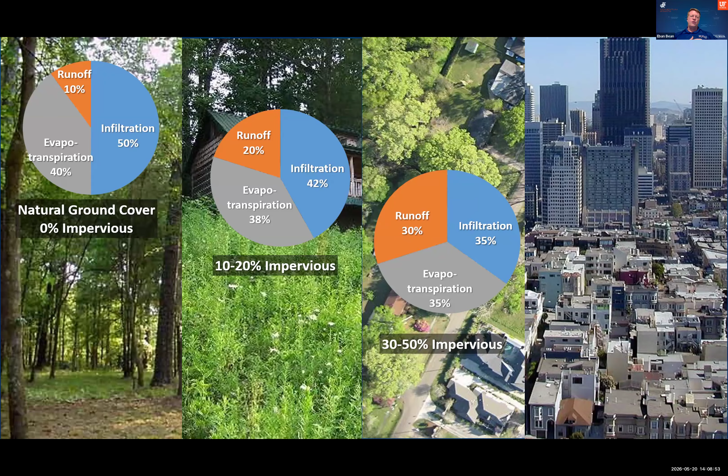And now when we look at 30 to 50% impervious, think of your residential development, basically quarter acre lots or smaller, we've got maybe 35% infiltration, 35% evapotranspiration, and we're up to about 30% runoff. And then in our ultra urbanized downtown urban centers, only about 15% of that rainwater infiltrates through cracks and limited pervious area. Then 30% is evapotranspiration, which is most likely evaporation from puddles. And about 55% of that rainfall actually runs off.

Now, if we take the 30 to 50% imperviousness, the residential neighborhood, and compare that to natural ground cover, 10% runoff to 30% runoff, that doesn't sound like much. There's only a difference of 20%, but it's actually 3 times as much rainfall being converted to runoff by changing the landscape that way.

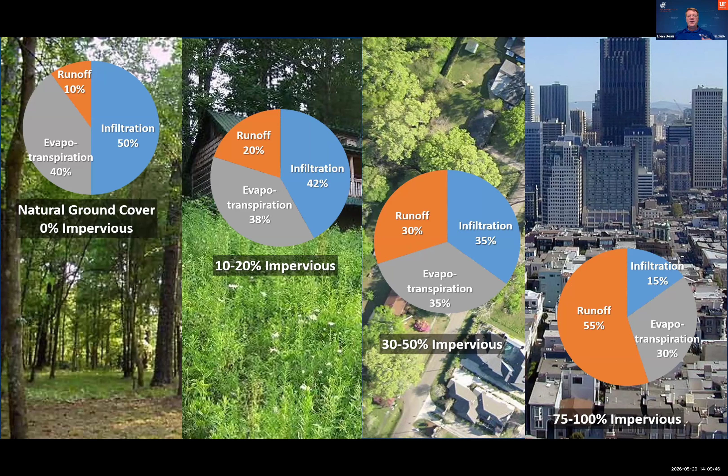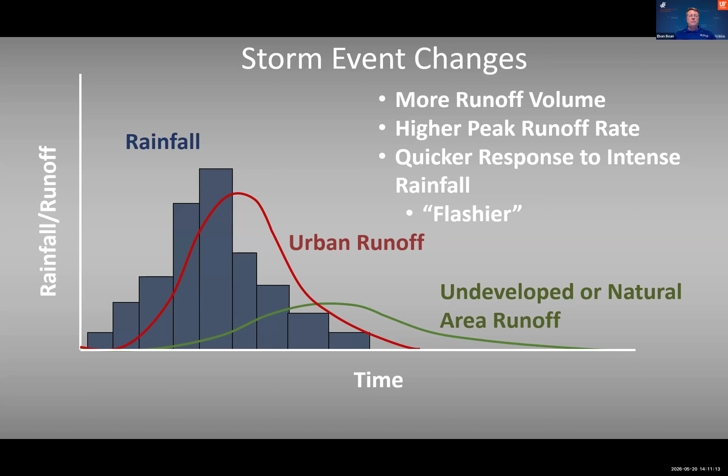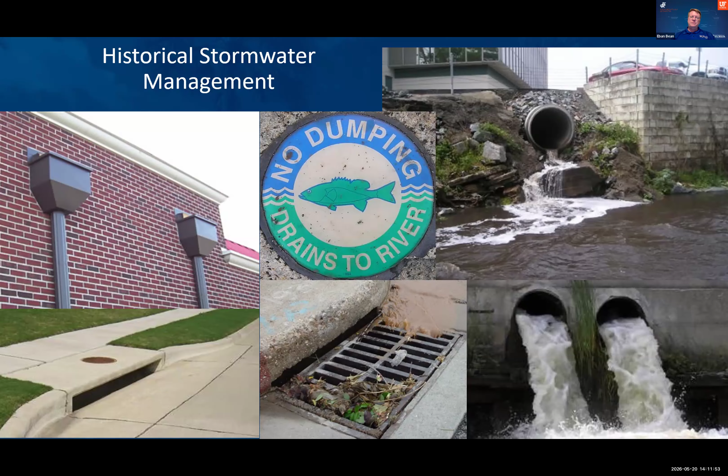And historically, our approach to stormwater management has been to essentially get water off site as quickly as possible. If you look at a lot of older cities and the older downtown parts, you'll probably see some examples of this. You probably don't see many ponds or open spaces. It's just pipes directed to the nearest creek or waterway. And we've gotten pretty efficient at this. You'll see scuppers on the side of buildings that route roof runoff directly down to the street. We've got stormwater inlets and grates, and then those go into stormwater pipes that discharge into that nearby waterway.

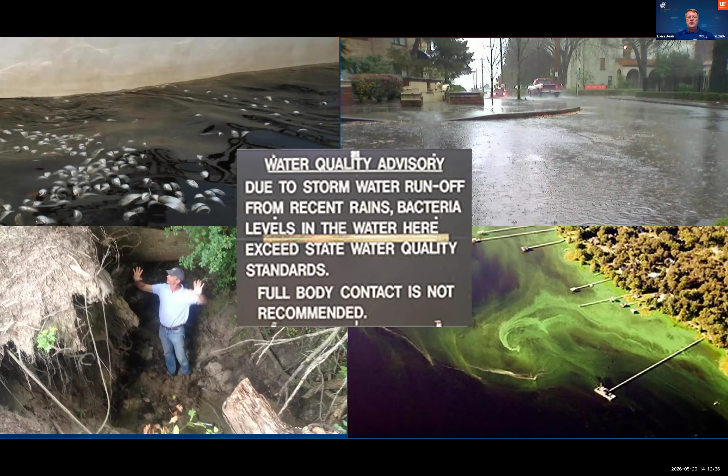But within that stormwater runoff, there are also water quality issues that come from it. We can have fish kills. We can have erosion. This is a friend of mine that's about 6'4" in a channel that's about 20 feet deep by about 6 feet wide. But we also have excess flooding. So when we get water off site as quickly as possible, that might be good for you. But if all that water is coming to you downstream, then you are the one that gets flooded out. That's not a good situation. And we also can have drivers for algal blooms here.

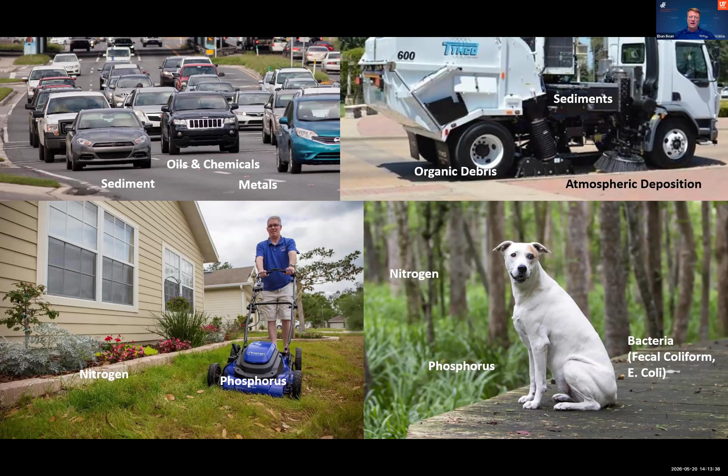When we think of stormwater runoff, it's not just the volume, though. It's the chemicals that it washes off the urban landscape. A lot of the urban landscapes can be sources for these pollutants that we're trying to manage or eliminate. Our roadways can accumulate oils and chemicals from cars, sediments, and metals like brake dust. Parking lots can collect sediments and organic debris. There's actually atmospheric deposition of contaminants or nutrients that accumulate over time. Our lawns can be sources of nitrogen and phosphorus, particularly if we're fertilizing inappropriately. And then our pets. This is not my pet, but essentially they are walking, barking point sources of nutrients and bacteria. If we don't pick up after them, that can enter the environment and wash off as well.

So let's start it off. Let's give a trial to the quiz poll here. Becky, if you'll go ahead and start that first poll. All right, I'll give you a little bit of time, but the sooner we get everybody's responses in, the sooner we can continue on. Let's go ahead and get those answers in. All right, I'll close this poll in about 5 seconds, so make sure you get in there. 4, 3, 2, 1. Let's go ahead and close that out.

All right, and so the answers were: runoff is what increases most in urban areas compared to natural areas during a storm, and the higher peak flow and quicker response is what often happens with runoff. So nice job, folks. Nice job. Okay, all right. Moving on to our next topic.

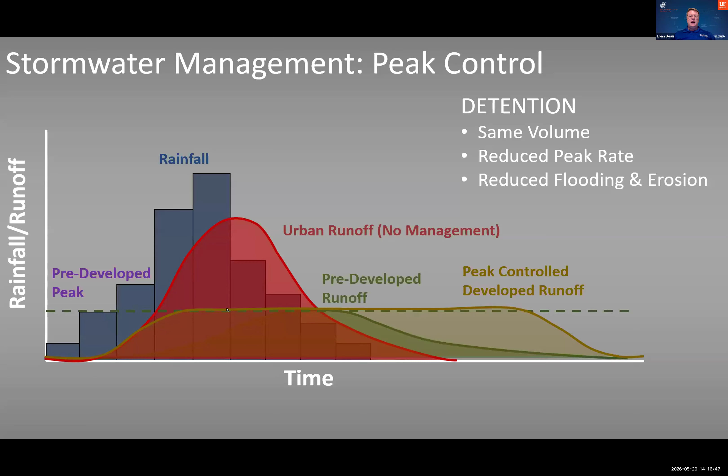So with detention, that's the approach here, where we capture that additional runoff and slowly release it over time. If we look at what our pre-developed runoff is and our urban runoff without any management, we see that increase. But if we identify this pre-developed peak as the allowable flow rate for stormwater to move through, and we capture that water and extend it out at a lower flow rate over time, we can reduce the flooding and erosion, reduce that peak rate, and reduce the risk of flooding downstream.

So when we look at the size of storms that we are trying to manage for flooding and design for, we can't design for the 1,000-year storm event. Those happen so infrequently and they're so large that it's usually not feasible to design for them. What we are typically required to design for are storms with a duration of 24 to 72 hours, and typically storms that are somewhere between a 25-year return period and a 100-year return period.

So with the return period, that doesn't mean that one storm of that size will occur within 25 years for a 25-year storm event. It actually means that there's a 4% chance of that size storm event occurring in any year. And similar with the 100-year, it's a 1% chance of a 100-year storm happening every year. So that's how we can have 100-year events in multiple years that are not separated by 100 years.

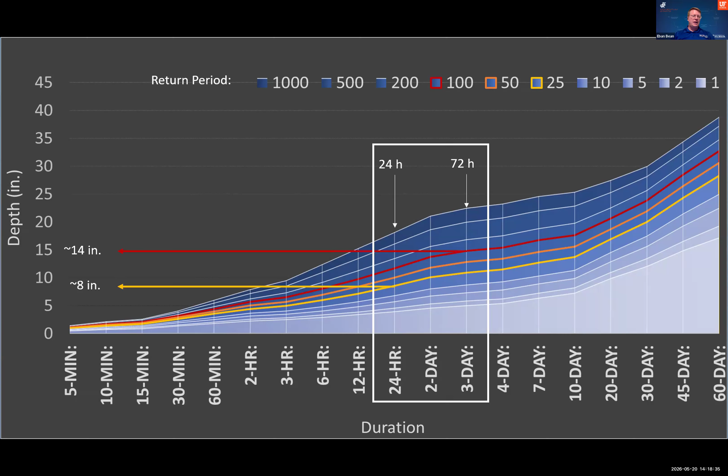Okay. But if we look at the size of these storm events for flooding, we're looking at somewhere between 8 and 14 inches of rainfall as that design storm. So if we have a hurricane or a large storm event that exceeds 15 or 20 inches in many parts of the state, then that's going to have more water than our stormwater systems can manage. And it's going to overflow, and we're going to have extra flooding occur within our communities. Yeah, so I forgot to bring that up earlier. So yeah, we're looking at that range, 8 to 14 inches.

So stormwater ponds are one of the main ways that we have implemented to try to manage the flooding and manage peak runoff rates. And if we look around Florida, we did this analysis a few years ago. There's about 76,000 ponds statewide, and that's probably a low estimate now, just because of the amount of development and the continued installation of stormwater ponds around the state. There are so many stormwater ponds that they even take up more area than industrial land uses, which is pretty surprising. So it's a pretty prevalent part of the urban landscape.

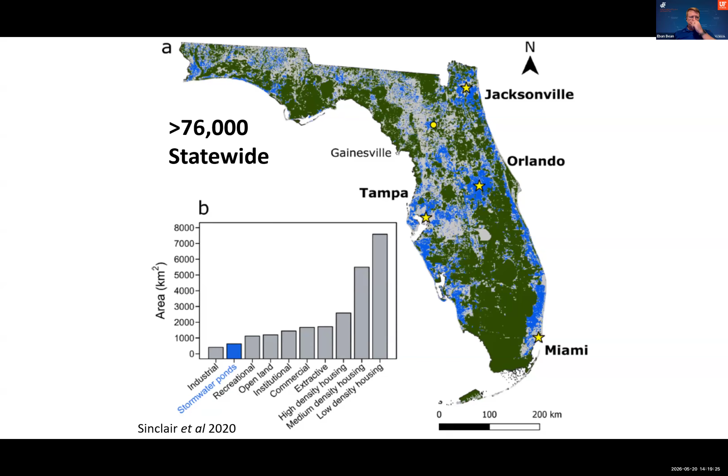So the orientation, or what we typically see within a lot of land development and a lot of projects around Florida, is that we have our urban area, and in this case, we're looking at a residential neighborhood. We've got rooftops that drain into the driveway and then flow into the street, which then flows into a storm drain inlet and into a stormwater pipe collection system that then goes into a stormwater pond for an area of this residential development.

And this stormwater pond is intended or designed to address several things. Number one is flood control. So capturing that runoff volume and then slowly releasing it. By doing that, it's also reducing that peak rate. And then we also have water quality benefits.

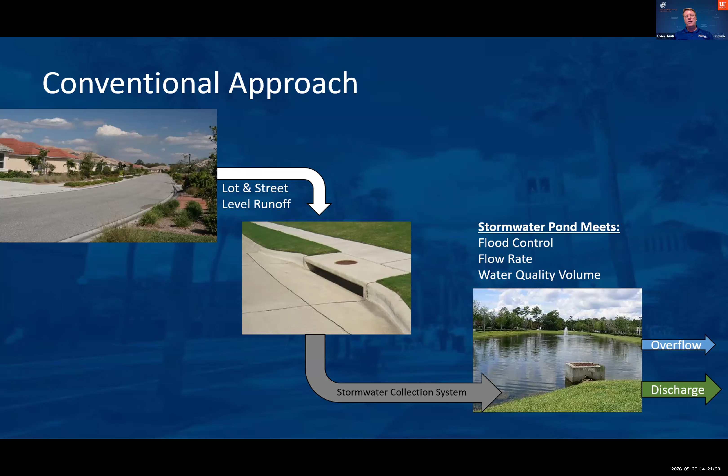Now, one of the things that is unique about Florida compared to many other states is that anywhere else in the country, the pollutant of concern that causes the most problems is total suspended solids, or sediments in the water. And oftentimes they have very fine clay soil that will make it very cloudy. And those areas oftentimes have a lot of steep topography, much steeper than what we have in Florida. And so they can actually get a lot of channel erosion. So streams will start to cut down and widen, and a lot of that sediment can be moved from the stream channel. Not the case so much in Florida, other than maybe in the Panhandle and out to the northwestern part of the state. Here, our biggest pollutant is actually nitrogen and phosphorus. And so those are our main pollutants of concern. And that's what our stormwater pond treatment is intended to address.

So while stormwater runoff is one of the main contributors to water quality impairment, agriculture also contributes some to water quality impairment, as do septic systems. So urban is not necessarily the biggest driver, but it's one of the top causes for water quality impairment. And so it's important for us to address that. But what we see essentially is that stormwater runoff, urbanization, impairment, or the poor water quality tends to follow, over time, the urbanization of watersheds.

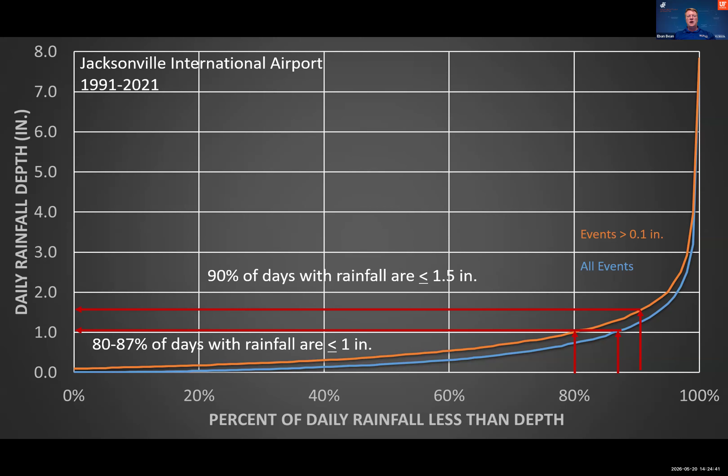And what's interesting is that a lot of the nutrients in runoff, particularly nitrogen, is contributed by these smaller afternoon thunderstorms that occur on a regular basis, right? So it's really these smaller storm events that are driving the water quality rather than those larger 8 to 14 inch hurricane storms. So 80 to 87% of days have less than an inch, and 90% of days have rainfall that is less than an inch and a half. So a very small amount of rainfall on a regular basis is contributing a lot of our nutrients to stormwater.

So next, I want to get into the nuts and bolts of stormwater systems and talk about some of the different components, so that when you're in your communities, you can identify and see the different elements of a stormwater system and better understand what's happening there. So we're going to break it down a few ways. The watershed is the land that's developed, and that's where runoff is generated, right? Then the water comes off of that landscape, and it's collected into inlets. That's where water is directed into pipes or channels to convey it to another location. And that's where it's usually routed to a stormwater best management practice. And in Florida, many times this is going to be a stormwater pond of some type. We'll talk about what those are and how they function in a minute.

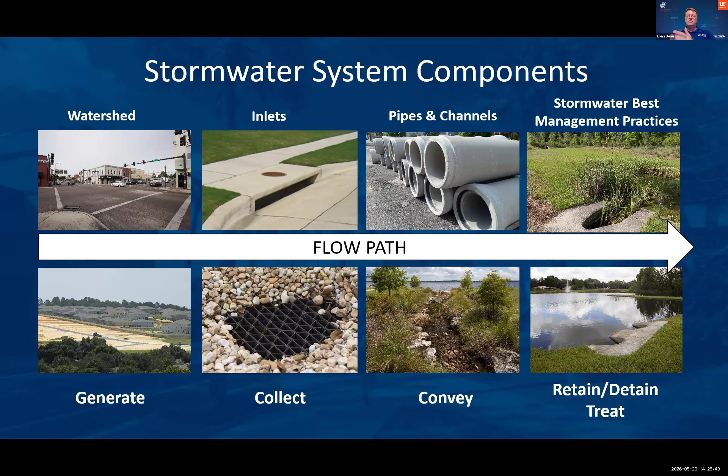But essentially, we have the flow path. We have rainfall in the watershed. That runoff then goes into the inlets, through pipes and channels, and into our stormwater BMP.

So thinking first about watershed components, within our urban area we have the impervious areas on the left, which are our rooftops, our concrete, and our asphalt. These are the surfaces that prevent water from infiltrating into the ground. And so that water, instead of infiltrating, has to go somewhere. That's our runoff. On the right, we have our pervious areas. These might be forests or landscape beds or even lawns. These are the areas that can infiltrate rainfall, that can infiltrate runoff, and provide a function to us in that capacity.

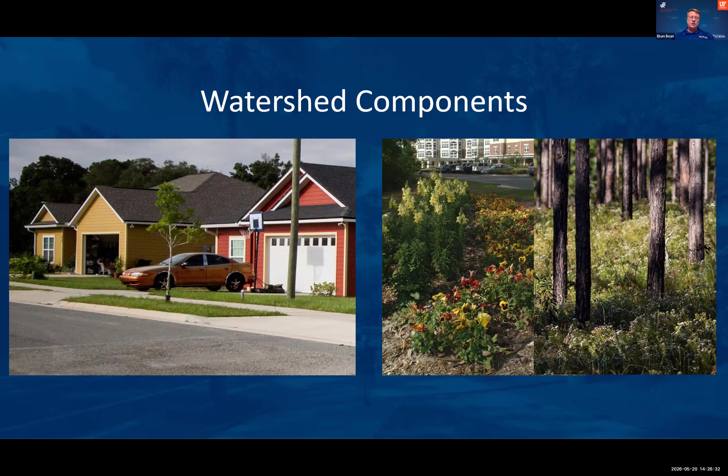Within the urban landscape, you'll often see this structure right along the sides of roads. You might have heard the term curb and gutter. I used to think that that was just the name of it, just one word, curb and gutter. But it's actually two distinct parts of the structure that's right along the roadway, right up against usually a pervious area. You have the curb, which is the vertical part, and the gutter is the bottom part. Now, you're probably familiar with gutters along the rim of your house, and that's the intent here, the place that routes and funnels water, right? And roads you'll find are typically crowned, so they're highest in the middle, so that water drains away from the center and gets conveyed to the curb and gutters.

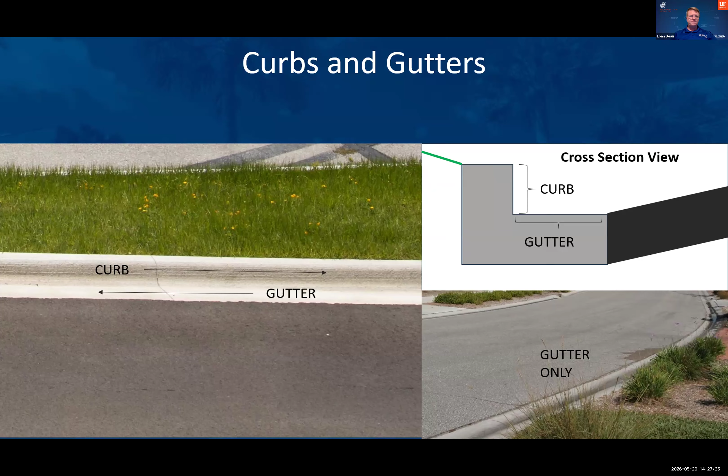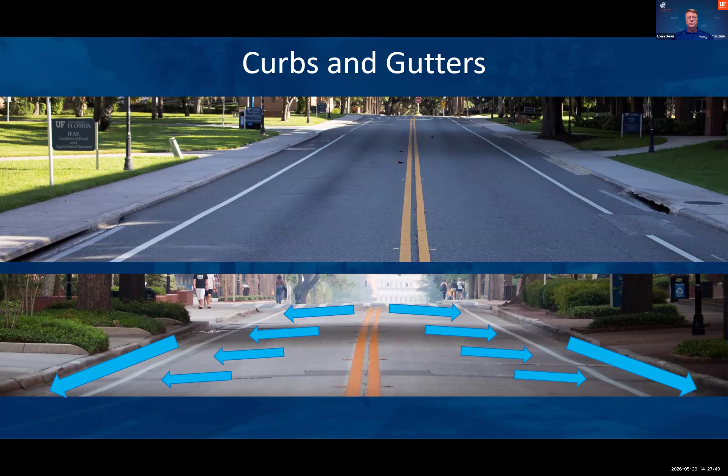Now, there's several different types of them. And this is essentially places where water transitions from the landscape into a structure that is intended to move it to a certain location. So the surface of the landscape will typically grade or slope to these inlet points. And this is usually going to be either a curb cut into a superficial inlet or a superficial structure, or you'll see a storm grate that water can basically flow down through.

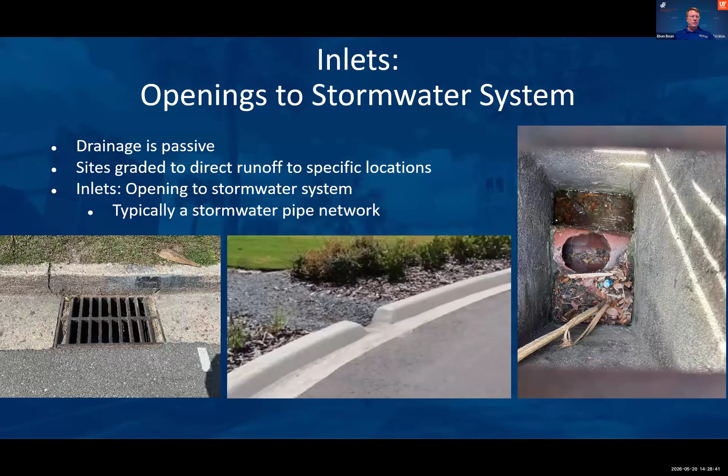So these inlets you'll see sometimes come in different flavors, if you will. These are a few examples of curb inlets where the curb goes along and there's a break in it, and then the water flows down and into a storm pipe. If you notice in the left example, there is a lot of debris that's collected there, and that will essentially eventually cause problems if that material builds up and blocks the flow of water into it.

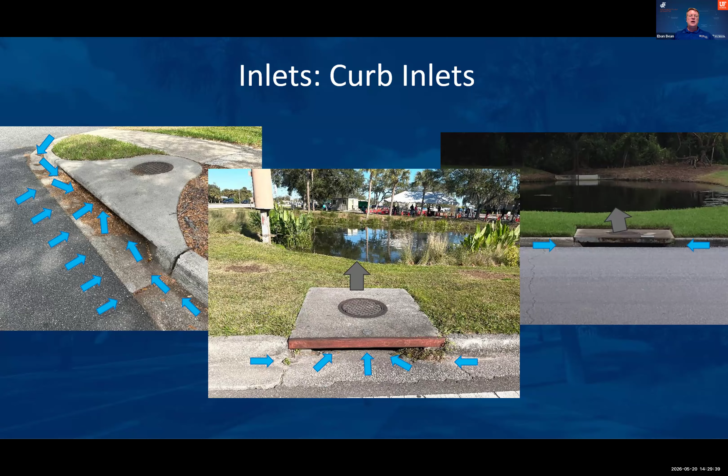So it's good to make sure we're not putting a lot of leaves down into that, and particularly not putting grass clippings, because that can carry a lot of nutrients with it. But you can see with each of these scenarios, water basically flows or is directed to the inlet and then into a stormwater pipe that then goes, in these two cases on the right and in the center, into a stormwater pond immediately adjacent to it.

Inlets and grates, these are another common feature. You'll usually see these adjacent to roadways or in parking lots. And this is in low spots where stormwater runoff can basically drop vertically into a pond or into a pipe and drain. Part of the function of a storm grate is to create a smaller opening than a curb opening so that larger debris does not make its way into the storm drain system.

Now, you do see a combination on the left of a curb inlet and a stormwater grate. That can also be a configuration that we see as well. But oftentimes you'll see these grates on their own in a low spot of the road or a parking lot. And you can see where the flow lines go with this site. Again, on the left, with that yellow curb, note the accumulation of debris there. If that continues to build up, that can cause issues with the stormwater system by not allowing water to flow through as quickly as it's supposed to.

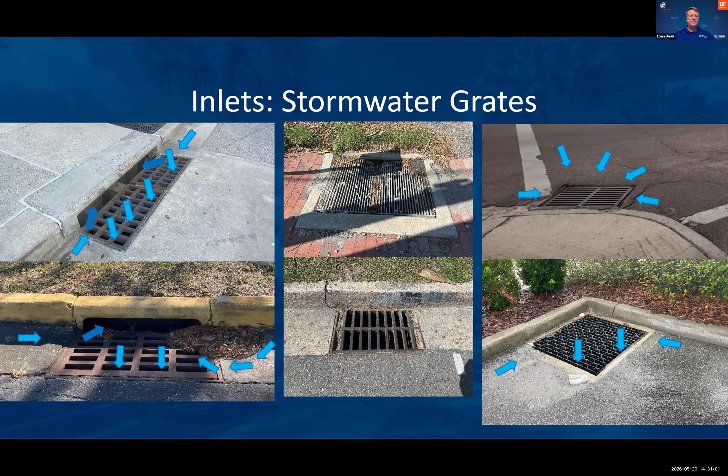Okay. Curb cuts, these are openings in the curb that basically try to connect impervious areas with the pervious area. And these are also areas where you can get accumulation of debris and cause it to back up and not function as well. But this is a really efficient way to make those adjacent pervious and landscape areas more functional so that runoff can basically flow onto this landscape and infiltrate or soak into the ground rather than having to go into a stormwater pipe network or into stormwater ponds.

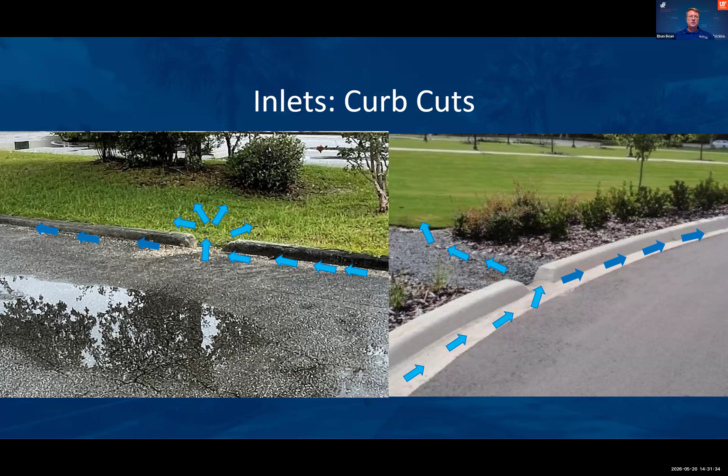Pavement drains, you'll find these in the middle of a roadway or a drive path. Essentially, they are a drop inlet into a stormwater pipe network. These are usually the low spot, and oftentimes it's actually within a parking lot is where I see them mostly, because the sites are graded to the stormwater inlet. And then they basically allow that water to go into a pipe network that flows downstream. Usually see this in a parking lot rather than a roadway, because oftentimes with roadways, we're crowning the road so that we are sheeting the water away from the roadway itself rather than trying to collect it in the center.

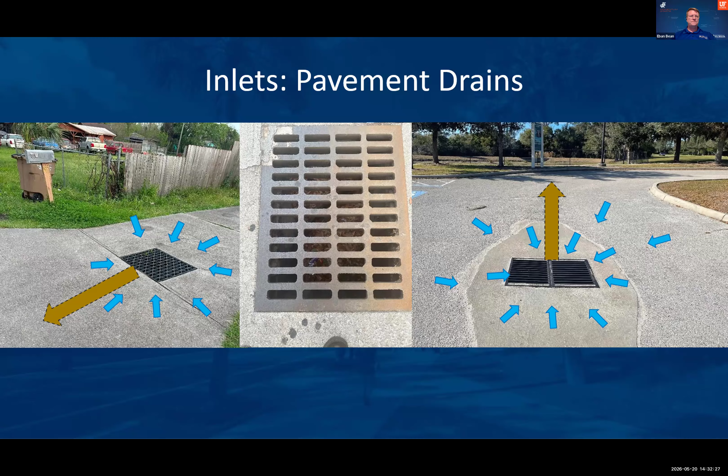Another configuration that you might see that's similar to those parking lot drains are field or surface drains. These are basically in the middle of landscaped areas or at the ground surface, which allows runoff to flow into them. Again, you'll see the screening function that's happening there, particularly in that upper center one. If debris is allowed to build up, that can again cause issues with water not being able to flow through as quickly as it's designed.

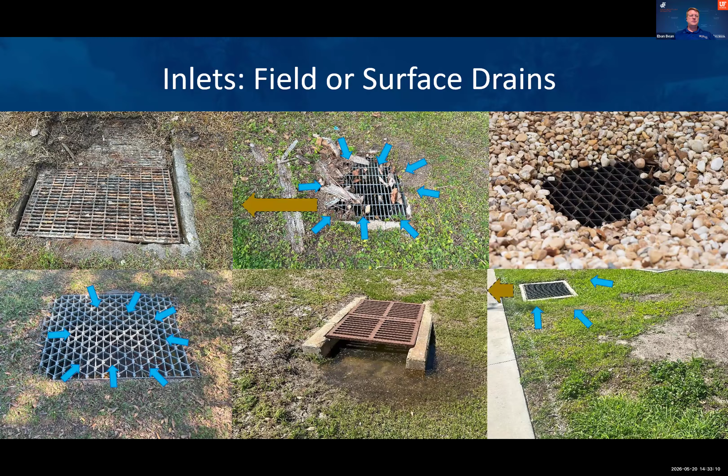Right. And so it's showing here that water collects at the surface and then can be taken away by a pipe underneath. So now let's take a look at the stormwater conveyance elements, stormwater pipes. These are oftentimes out of sight, out of mind. So you most likely have not seen these very much, but there are some pretty common materials.

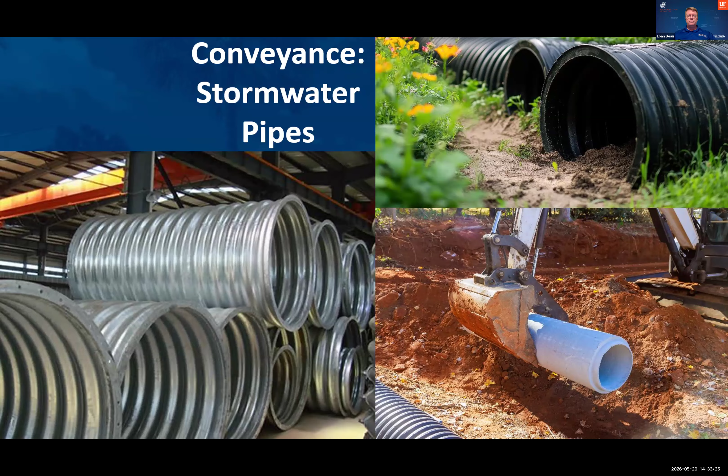So a lot of times we'll see corrugated plastic pipes, corrugated metal pipes, and concrete pipes. Those are the three most common types of material that we see in stormwater drainage. Ideally, we'd like to have smooth wall pipes rather than ridges or corrugation. This helps water to move completely through and not get trapped behind those ridges.

And when we see manholes, these are the pipes that are for our storm inlet or our stormwater system and not the sewer system. If you're ever curious which system a manhole is for, usually on the top it'll say either sewer or storm. You can take a look at storm if you want to, but I would not recommend opening a sewer.

Culverts are usually short sections of pipe that are intended to move water from one location to another underneath a roadway or crossing. That's essentially all that a culvert is. These can often fall into disrepair if they're not maintained. They can have accumulation of sediment downstream or upstream of them and get clogged. So maintaining them is important to having water flow through them.

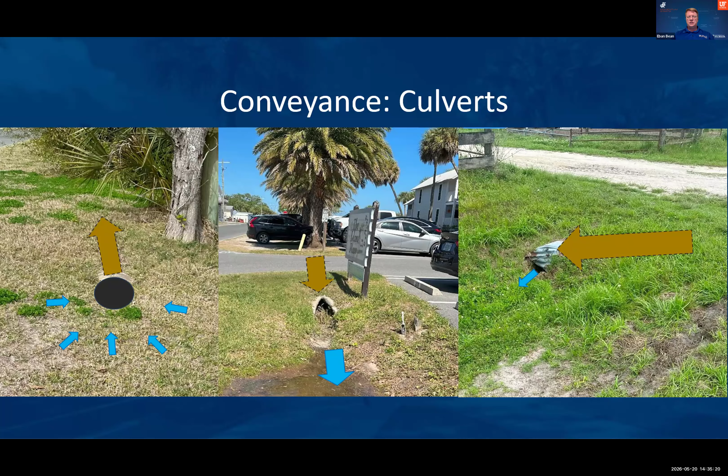And these can also be the inlet to a stormwater system. In this middle one, we've got water coming from the background to the foreground. And then here on the right, we've got water moving across. That blue arrow is so small because this corrugated pipe has likely been driven over a time or two and been crimped. So that opening is now smaller and it can be a restriction to the flow. Maintaining and making sure that those pipes are large enough is important.

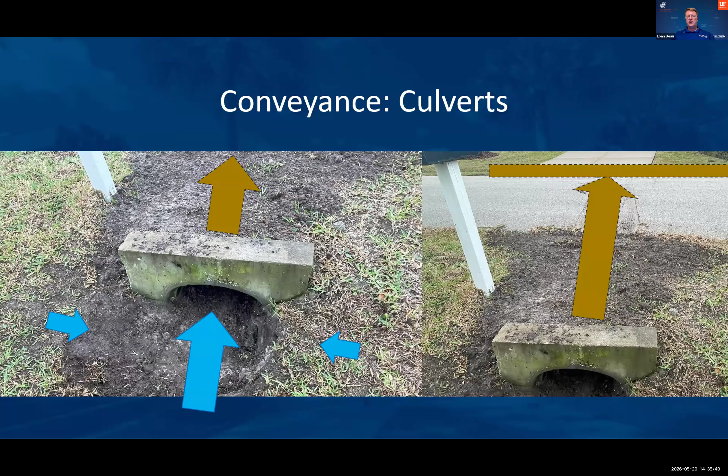Sediment is also a big concern. Sediment can accumulate in culverts and clog them up. It's really important to keep that clear. But usually you will have a swale that's leading into a culvert. Water drains from the landscape on either side and then accumulates and flows through under the pipe and into another cross pipe or other place downstream.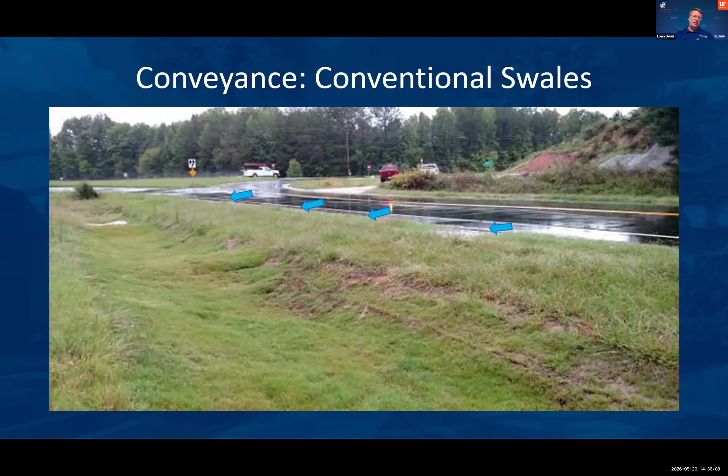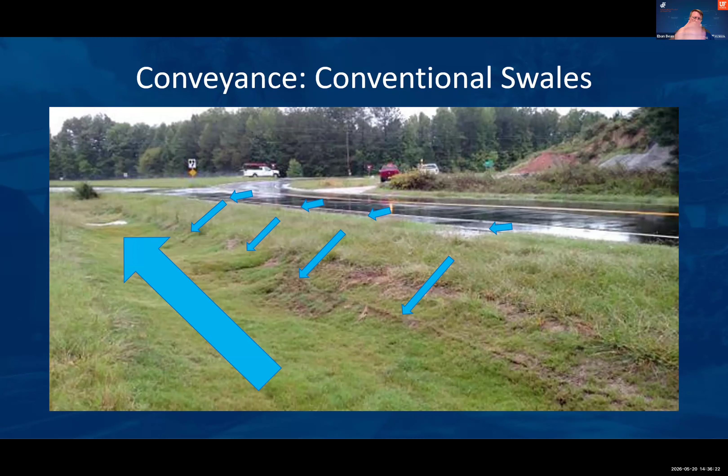A lot of times you can see swales along roadways. You may call these ditches in other places. I did growing up. But swales provide multiple functions. They not only do the conveyance and moving of water, with the roadway sheeting water down the slope into the swale and then downstream. As water moves downstream, that water is also allowed to infiltrate into the subsurface and get filtered. So it's providing some water quality benefits as well.

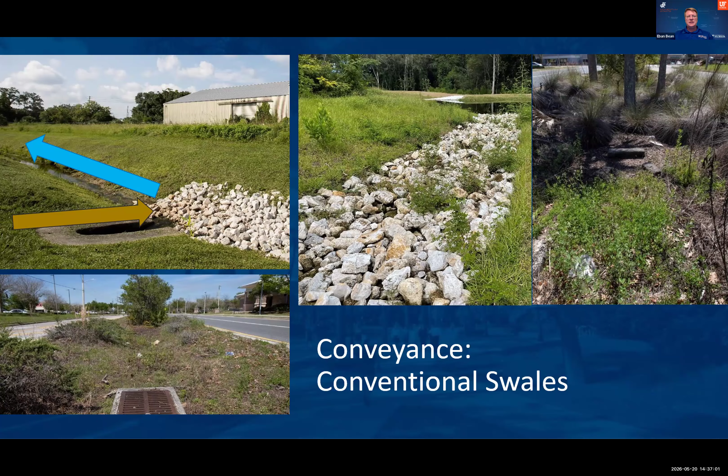Other ways that you might see swales, if there's an erosion issue, a lot of times you'll see larger stone or rock in the channel, and that's to make the channel more stable so that it's not washing out or eroding that sediment. You notice this figure in the upper left-hand corner, water's coming in this pipe from the left, and then it has to make a 90-degree turn and go up and to the left. That is what's causing some erosion here. So you can see they've tried to stabilize that with the rock, and in this middle picture as well.

All right, let's take a break and have our next quiz question. Becky, if you can throw that third question up. Let's see if you remember from early on in the presentation.

With stormwater management, a lot of the decisions that were made early on, that infrastructure is still in place and the effects of that remain today. So it's one of these sins of the past that continue to present themselves as we look at issues that emerge with stormwater management in many of our older communities or older sites.

Let's be sure to get our responses in so we can stay on time, stay on track. Okay, looks like we're going to go ahead and close that out.

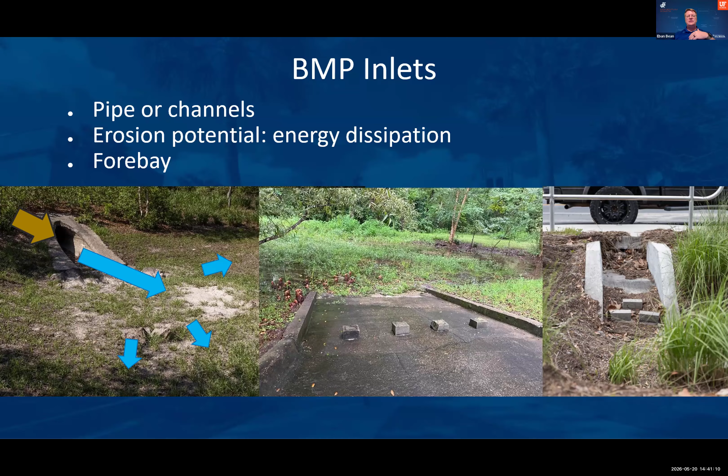All right. So with the one on the left, we have that water coming in. It can kind of erode out this area, and then water basically spreads out and dissipates that energy. If we need to reduce that energy more, other ways that we can control or dissipate some of that energy are through these blocks in these channels as water comes in. That can help to dissipate it. There's also a structure known as a forebay that will essentially create a pool at the inlet, and that can help to dissipate the energy as water comes directly into that BMP.

Now, there's two different ways that BMPs can be configured with a stormwater pipe system. Well, there's always a capacity limit to a stormwater BMP, whether it's a pond or a tank or whatever. There's a maximum volume that once that's reached, that excess water needs to continue to be routed somewhere else, right? And so we can either have the BMP be online or offline. And so I want to kind of illustrate what the difference is here.

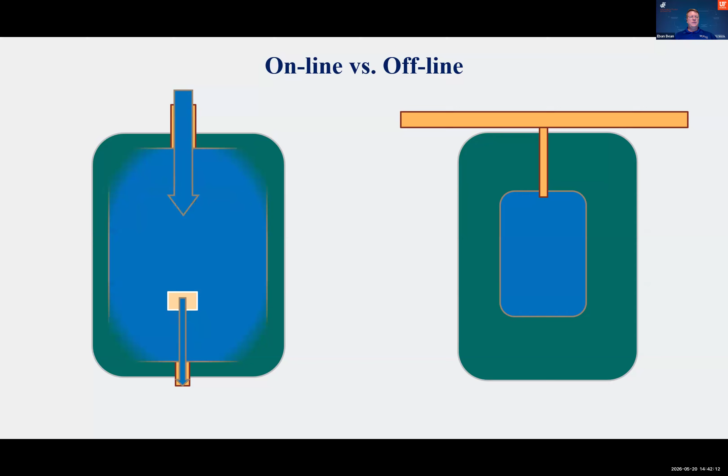So with online, we have water come in for small storms. Water comes in and then bleeds down fairly quickly. And we don't see a whole lot of change in the water volume of the pond in this case. For larger storms, though, that water comes in, fills up the pond, and then it overflows or bypasses that outlet structure. So essentially, all of the water that comes off of the landscape and into the stormwater conveyance system moves into and out of that pond.

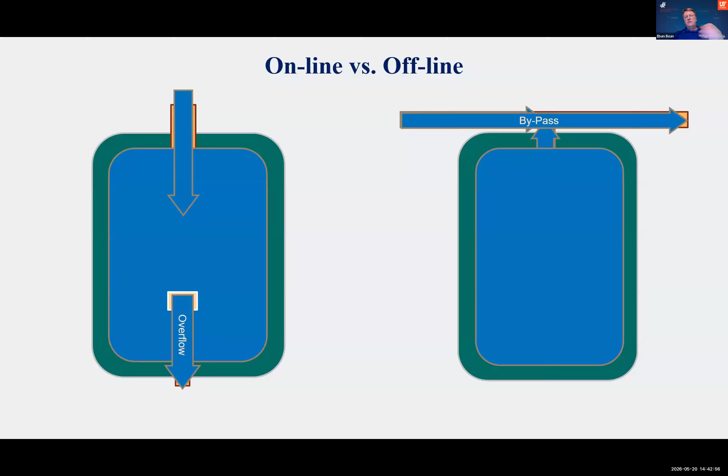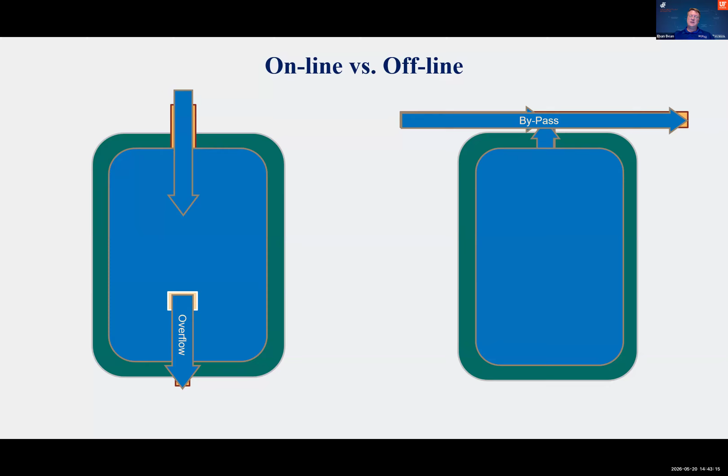If it's offline, for small storm events, we basically have just direct flow directly in, and we don't really see much difference in the operation. But when we have a large event, we'll have a high flow come in, fill up that pond, but then instead of overflowing downstream, it actually backs up the water level, and then we have bypass where the extra stormwater bypasses that inlet and continues to flow downstream. So now not all of the runoff flows through that BMP. It's really just that first volume of storage that fills up the pond, and then the excess goes back down beyond it.

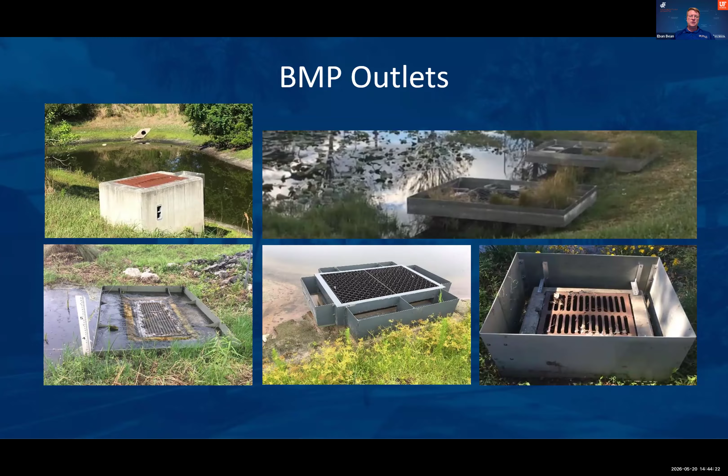So when we talk about different types of ponds or different types of BMPs, I want to go over sort of the main ones real quick. The first one is what we call dry retention. And this is something you would be able to see in areas that have very sandy soils and maybe even in the springs areas, but you've got very well drained soils where water can infiltrate into the ground very quickly.

And so essentially the main way that it functions is that water comes into the basin, it fills up and then overflows through the overflow structure, and that would discharge. But then essentially that water would soak into the ground. For the most part, you would lose a little bit to evaporation, but essentially it recovers its volume by infiltrating into the ground, and that also retains those pollutants.

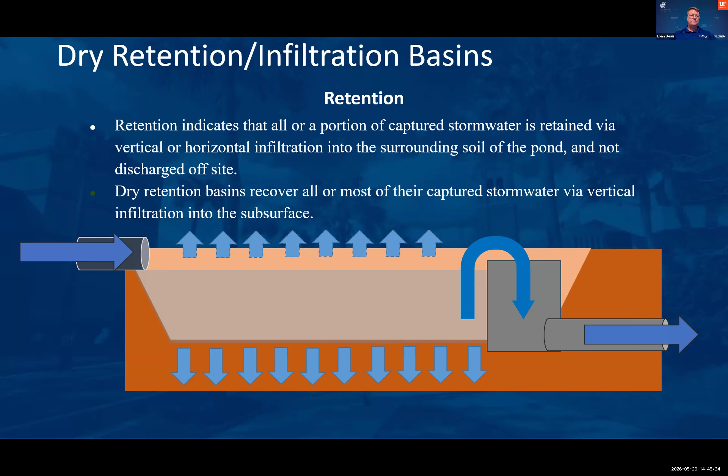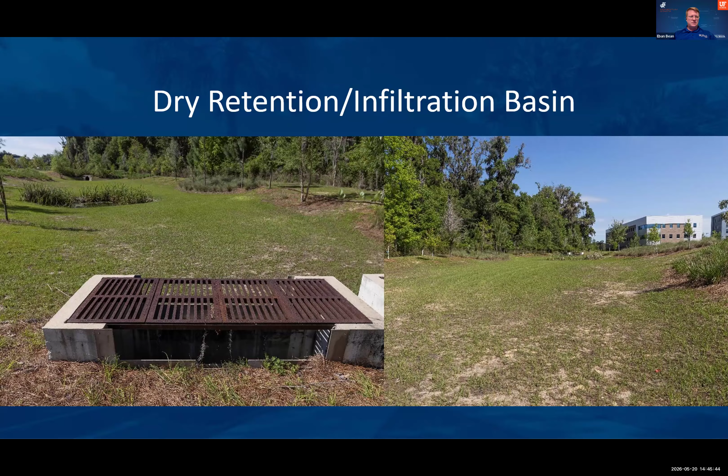And so you'd see a lot of times these will look like a grassed area that is a depressed or low lying sunken area. And so you'll see these in a lot of areas where, again, we have sandy soils, well drained soils. You're not going to usually see wetlands nearby. So keep that in mind.

Underground exfiltration is another way that we can basically take stormwater from the surface and infiltrate it below. These are typically configured offline, and essentially what you have is the stormwater comes off of a parking lot that overlies the structure, goes into a stormwater inlet, and then underneath that parking lot, it will flow into these half pipes, these structures here. There's a lot of volume, a lot of space there.

And so water flows into it and then basically seeps into the subsurface or into the ground in between storm events. You'll notice in the lower right hand and lower left hand corner, there's sort of stone on top of these half pipes, and that's to add structural support so they can support the weight of the parking or whatever is being used above it. But essentially, very similar to a septic drain field if you're familiar with how those function and are configured. So again, water comes in, fills up those voids, or fills up those half pipes, and then it infiltrates into the subsurface below.

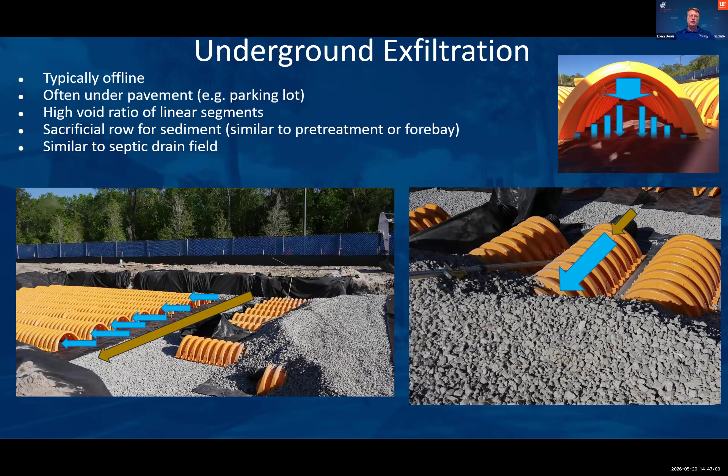Groundwater mounding is something I want to touch on just briefly because it can explain why, for example, a dry retention or any other infiltrating practice may sometimes, for certain storms, recover completely very quickly, but for other storms it may stay ponded for a long period of time. So here we have the groundwater down below and an infiltrating practice at the surface. And when we have a storm event, it fills up and then that infiltrates into the ground.

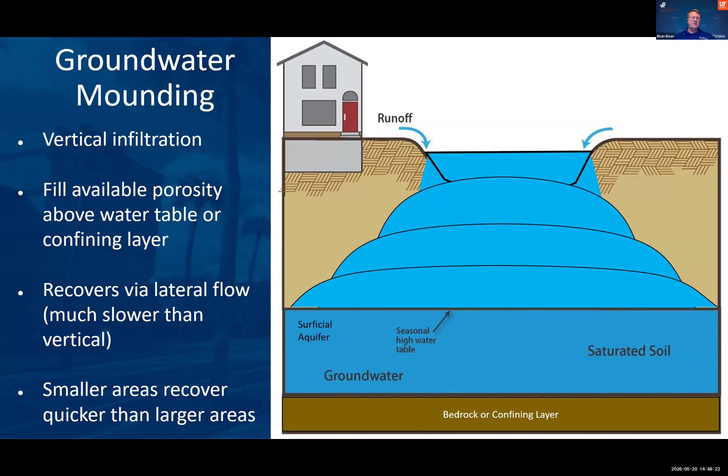But then that volume of water, as it starts to infiltrate and hits that groundwater, can no longer infiltrate vertically. And so what happens is that water volume starts to spread out, right? This mound basically has to spread out for that water level below to continue to fall. And so it takes a long time for that to occur. And so if you have another storm event soon after one of these events, then that groundwater essentially mounds up underneath this infiltrating practice,

and so it can interfere with its ability to recover the storage over time. Wet stormwater ponds, wet retention ponds, are one of our most common types of stormwater BMP. Again, similar to dry retention, they basically retain a certain volume. So runoff comes in, fills up the pond from the normal water level up to a design level. If we have excess water, that will overflow through the outlet structure and downstream.

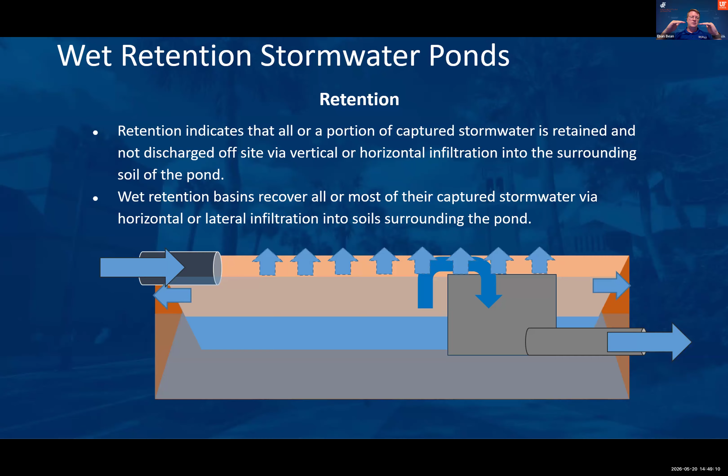But then over time, it will essentially infiltrate laterally, and we will have evapotranspiration, right? Because oftentimes what's happening here is that we are intersecting the groundwater, the water table that is perching that water to maintain water in these ponds permanently.

Detention ponds are actually not intended to remove volume. They are essentially just for controlling the flow rate and really for flood control, basically reducing that peak runoff rate. And the way that these work, whether it's dry detention or wet detention, is kind of similar. You have water come in to the pond, it fills up, it overflows, and then basically all of that water bleeds back down, and you have the same amount of water that leaves the pond as came into it.

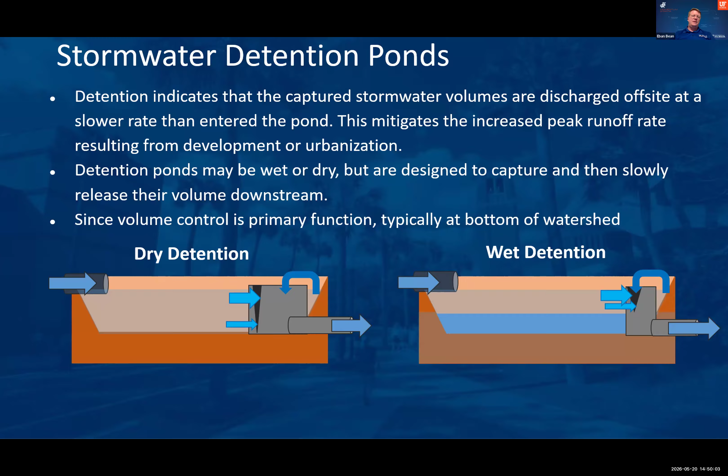With wet detention, water comes in, it fills up above the permanent pool, and then that water will overflow, and then it will slowly bleed down afterwards and discharge downstream. One of the main things is that we don't have very much benefit from water quality with detention ponds because that volume of water is not meant to stay.

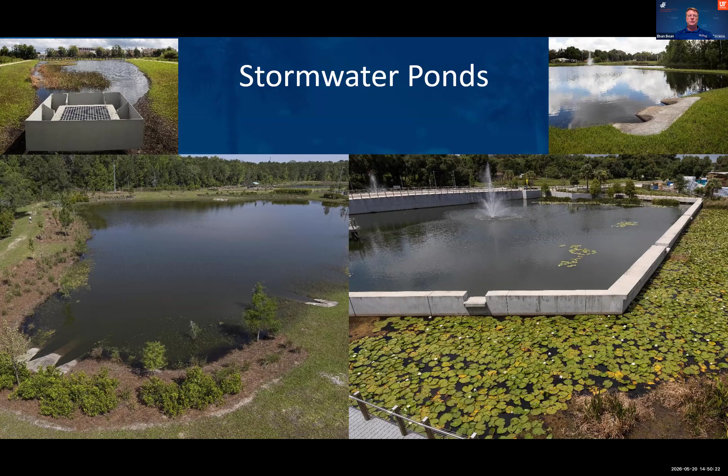But you'll see different configurations of stormwater ponds around Florida. You can see different inlets and outlet structures. They make up quite a bit of our landscape.

And so, Becky, if you could throw up those last two quiz questions. Thank you.

All right. Let's go ahead and get those answers in. All right. Going to be closing here in about 5 seconds. So get your answers in. 4, 3, 2, 1. All right. Let's see how we did.

Very good. Yes, nitrogen is a common pollutant in urban stormwater. And the purpose of stormwater detention is to slowly release water to reduce that peak flow rate, because we're trying to minimize flooding.

All right, we're on the home stretch. A couple more aspects. I wanted to touch on some green infrastructure that you might see in Florida. One of the more common ones is permeable pavements. A lot of times they look like conventional pavements like bricks or asphalt or concrete, but they allow water to drain through them. In a rainfall event, water drains through, builds up, and then can slowly soak into the soil below, or it can have an underdrain that allows that water to drain out.

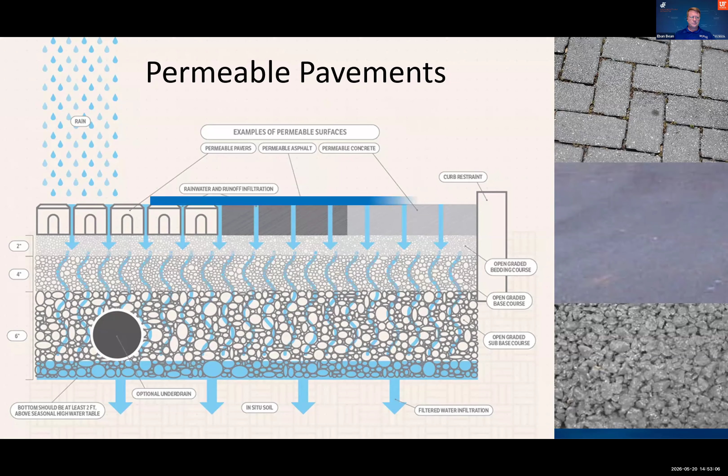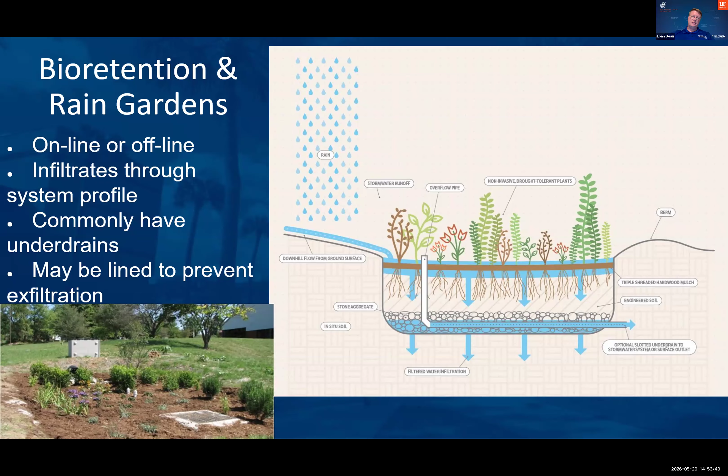With bioretention, these can be online or offline, and they are oftentimes smaller scale dry retention, but they usually have vegetation planted in them to look nice and provide an aesthetic. They commonly have underdrains to make sure they recover the volume within the practice before the next storm event. Water drains through the surface into a stone layer below, and a slotted pipe takes that water downstream. Usually within about 24 hours, it can be recovered.

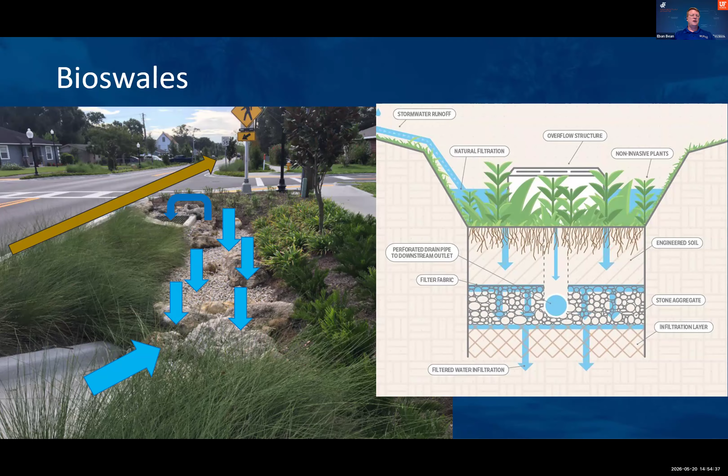Bioswales are a twist on bioretention. Swales are meant to convey water, and this is intended to do the same. You're usually taking water from one place to another, but it forces a certain flow rate of water down through the engineered soil and into the stone layer, where an underdrain pipe routes it into the stormwater network and takes it downstream. If there's excess flow rate, it can overtop the overflow structure and go downstream directly without being filtered. And if the flow rate exceeds the storage of the bioswale, then it can bypass.

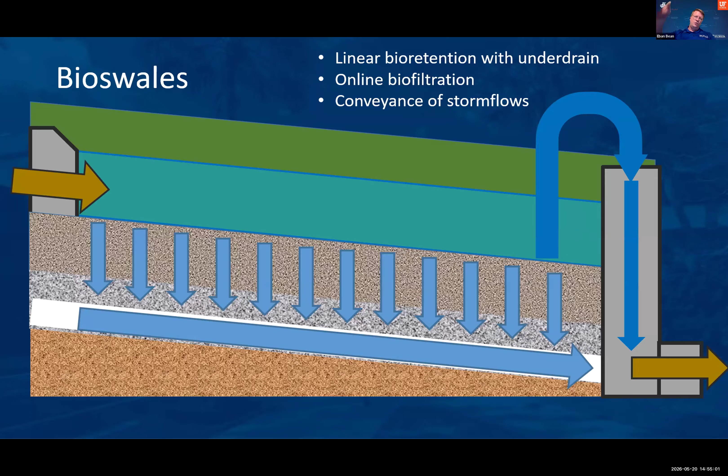Here is another look at bioswales, just a cross section. Usually you have water coming in, and that water builds up and is forced to go down through different layers of soil or media to improve the water quality. The underdrain collects that water and sends it into the drain downstream. If the water level gets too high, it will overflow into the overflow structure.

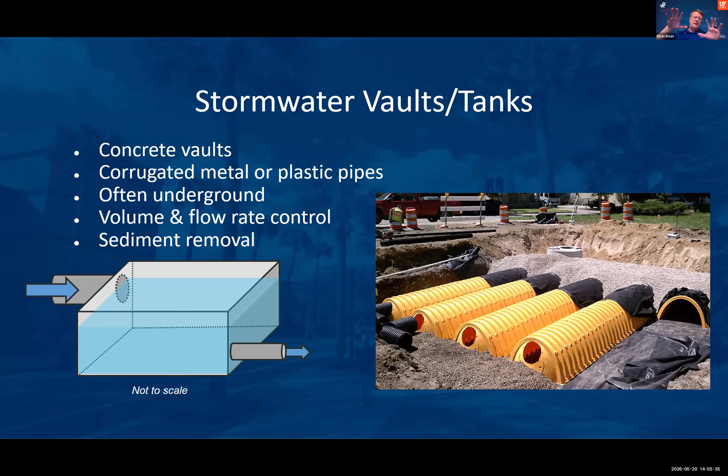Stormwater vaults are another practice that is not necessarily green infrastructure, but they are very common. This is essentially a detention structure meant for volume and flow rate control. They do have some sediment removal, but essentially it's like a big tank that's underground. It looks a lot like the subsurface exfiltration, but the system on the right does not exfiltrate or allow water to drain. Water fills up and comes in very quickly and then slowly bleeds down downstream, preventing flooding from occurring.